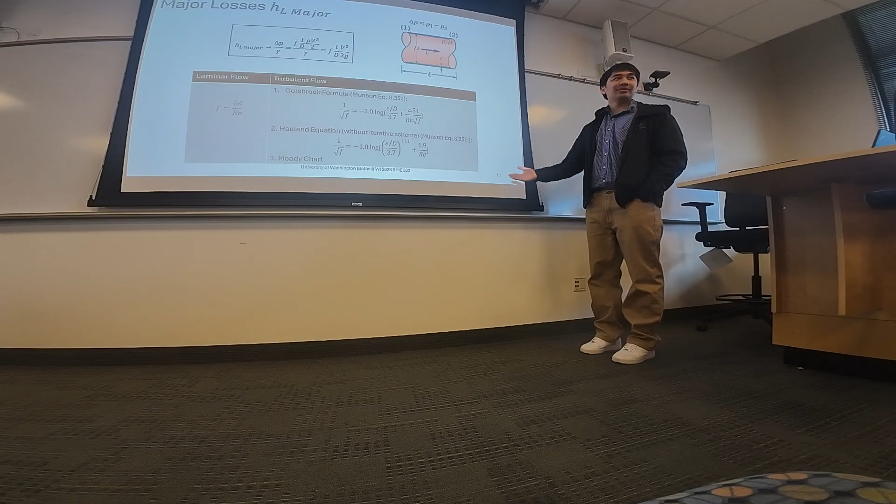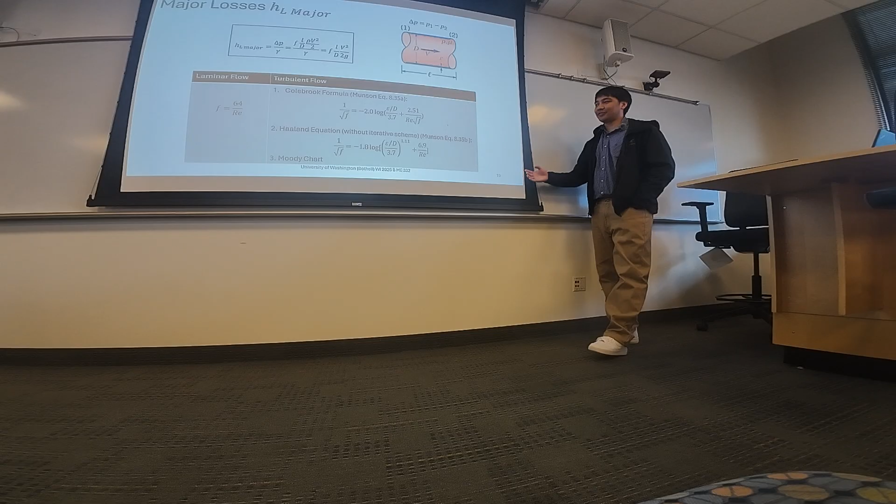And for turbulent flow, right, you have your Moody chart, which I showed you, but these are kind of the equations for the curves that you can plug and chug. If I ask for a specific one, I'll definitely state it. Right, the difference between these two formulas, this one is hard to solve for because there is a square root f within a log. So to algebraically rearrange this is a bit more difficult.

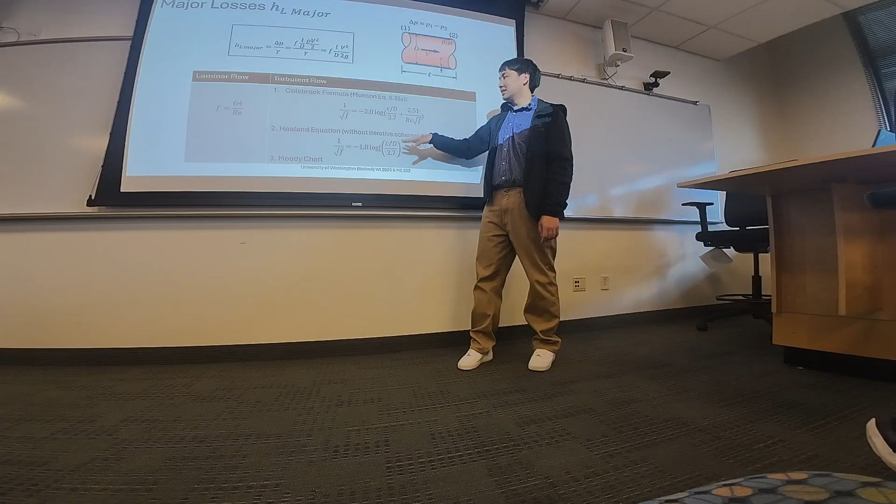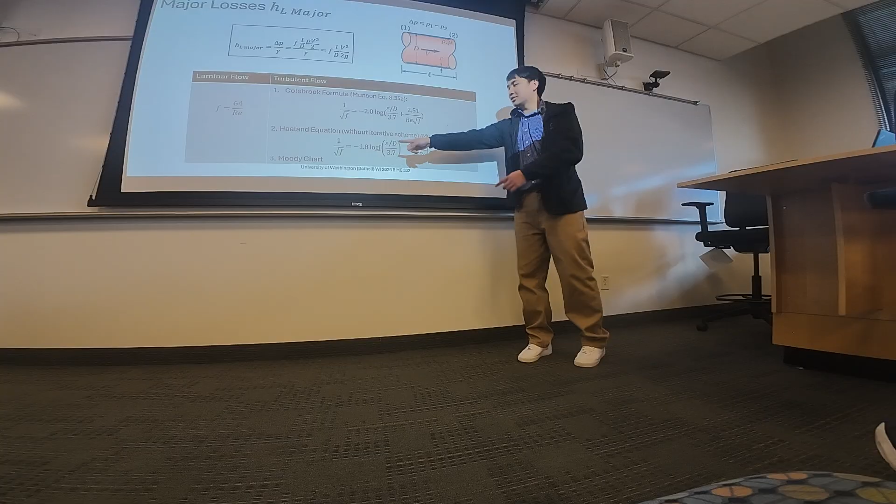This Haaland equation, hopefully I'm pronouncing that right, the friction factor is right here on the denominator. So right, like I said last lecture, you just multiply it over here. So it's on the top, this goes on the denominator, square both sides, and then you get your friction factor there. Or you can visually do it with the Moody chart.

Yes? Is there going to be a case where gravity is 0? Should not be, or else we would get a bad denominator, right? Because gravity would be in here. So, and we're always on Earth, so we'll have gravity. Okay.

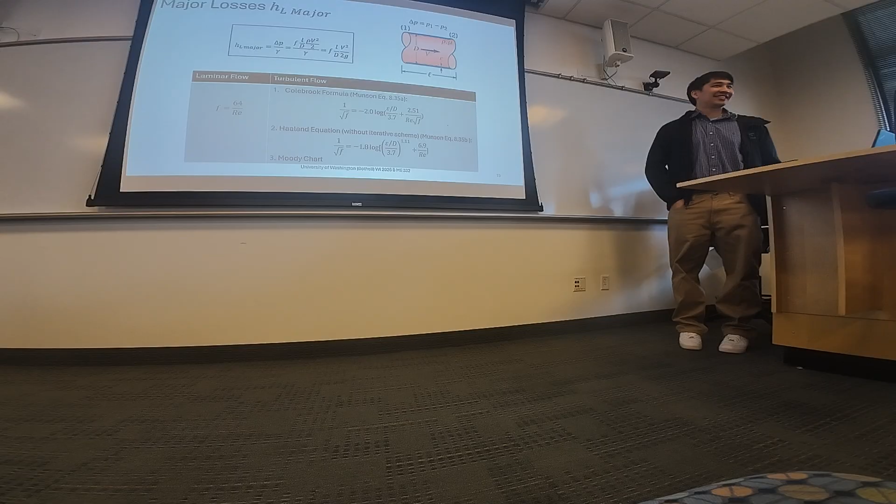Good. Okay, minor losses. So this has to do with loss due to piping components like fittings, valves, bends, tees, like in the dialysis presentation that we listened to, right? They have maybe some fitting components in their system. So there are some losses associated with that.

So the head loss, we already talked about that. The head loss for all components are given in a dimensionless form based on experimental data. So everything that we're going to talk about here for these fittings, they're dimensionless, kind of like our Buckingham Pi theorem. All of them, you'll see the graphs and stuff, they've just been tested by laboratories. So that's how we're going to get those values, and I'll show you.

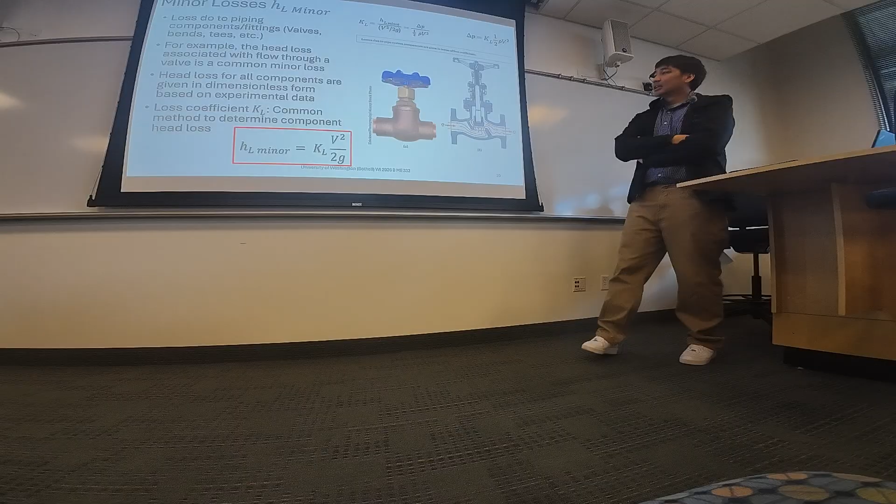And the big thing about this equation is your K subscript L. That is your loss coefficient. So that is basically the common method to determine your head loss for each component. So it's different for an elbow, it's different for a valve. I wouldn't worry about these equations too much up here, but if you need them for homework or something, right, KL is right there. It's your minor head loss divided by velocity squared over 2g.

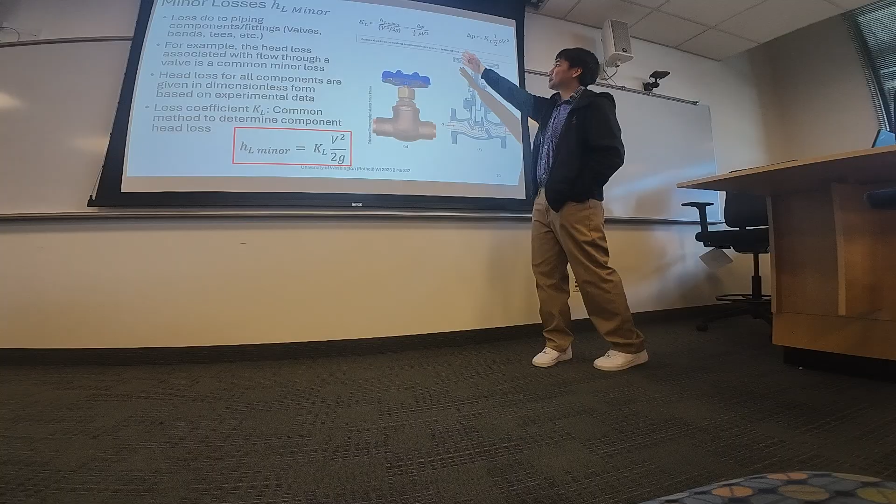And you can see you put in your pressure drop in there, delta P, if you need it, and you can solve algebraically here. The main equation you want is this, because this is what you're going to solve for when you plug into your Bernoulli's equation.

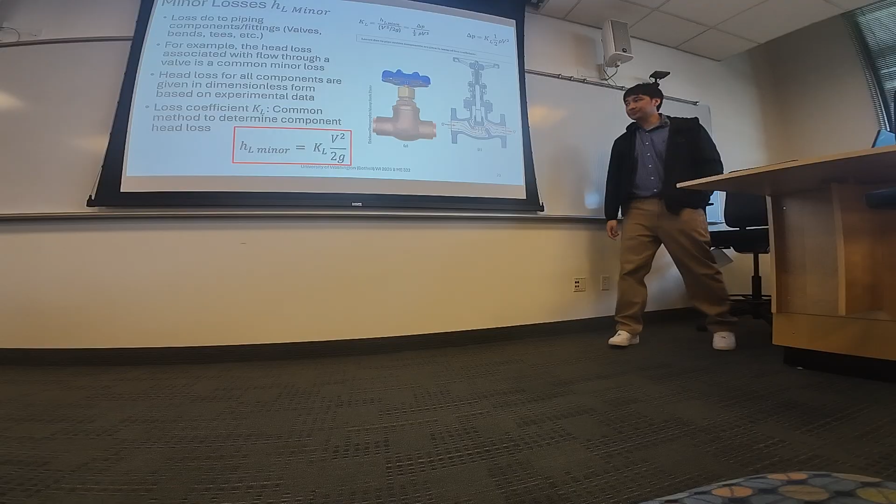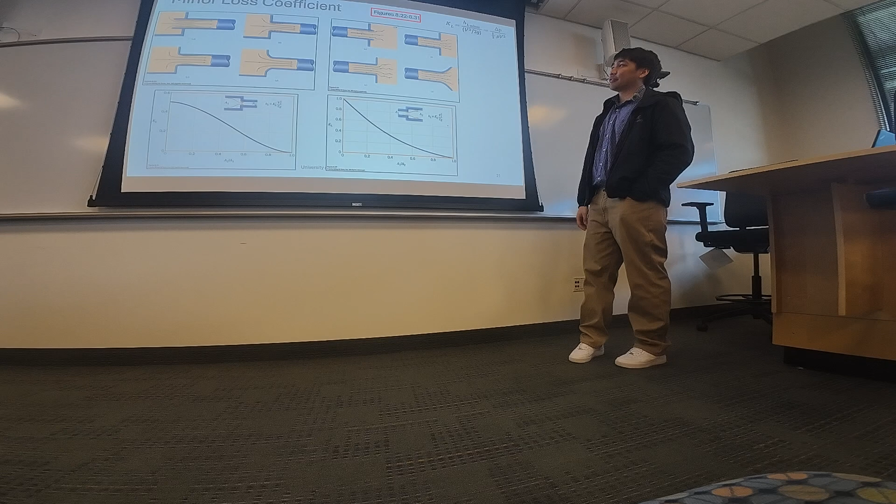Okay, so the minor loss coefficient, the KL that we need, you will usually get from these graphs and figures, right? And like I said, these are all experimentally tested already. And the moment you hear experimentally tested, you want to think in your head, ding, ding, ding, right? These are all not fully accurate, right? Because the person's experiment might vary from what you're working on. So just take that with a grain of salt if you ever have to do this for work.

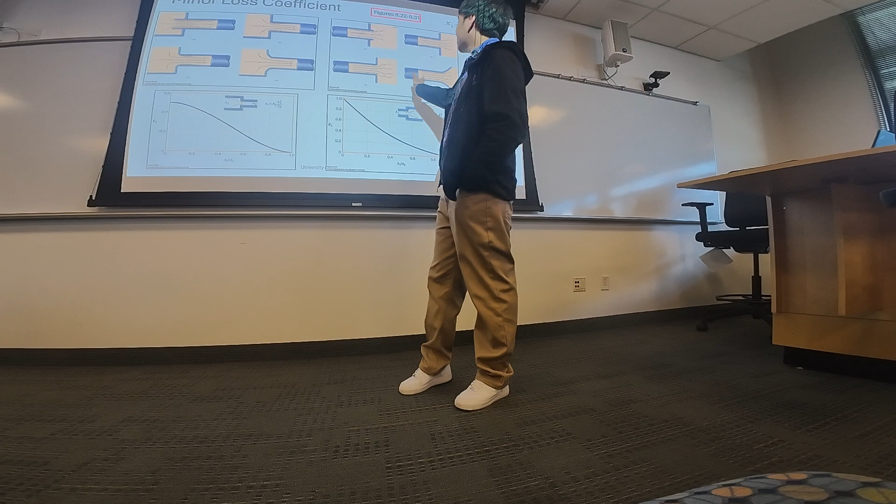So here, right, we have different scenarios. You can just see these are basically flipping, right? Your area 1 is greater than your area 2, or your area 2 is greater than your area 1. So you take the ratio of that, and then this is the experimental data that they made curves for already. And it's pretty straightforward, right? So you find your areas, calculate it, go up, find this, and then you find your KL.

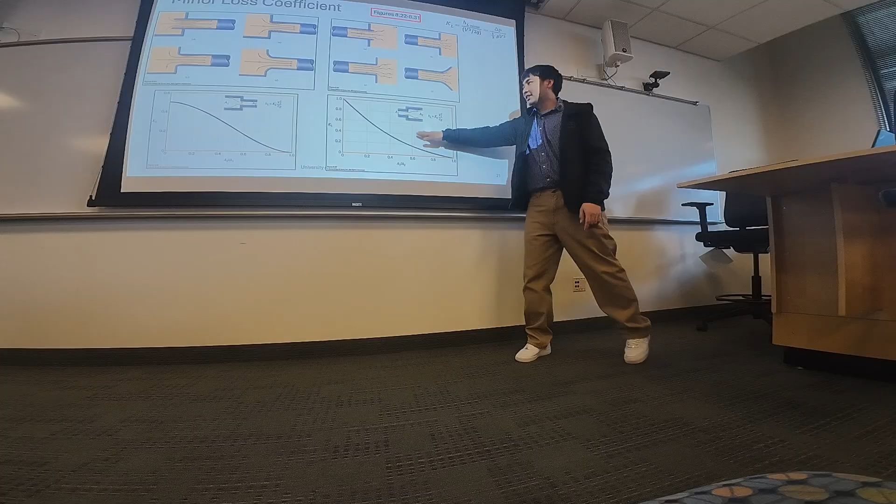Okay, non-circular conduits. We actually talked about this a few weeks ago, right? And the term conduits, that's just either your pipe flow or your square tube. So it's kind of weird. The textbook refers to it as non-circular, but this is just basically an annulus, which is a tube, but it's only like a donut. There's only water coming around it, not in the middle.

So I did not see any homework problems. I don't think I actually posted the homework yet anyways, but there's not any homework problems on these. But I wanted to mention it to you, since every single thing that we've been explaining for this chapter is all your standard pipe; this is if it were not to be a standard circular pipe.

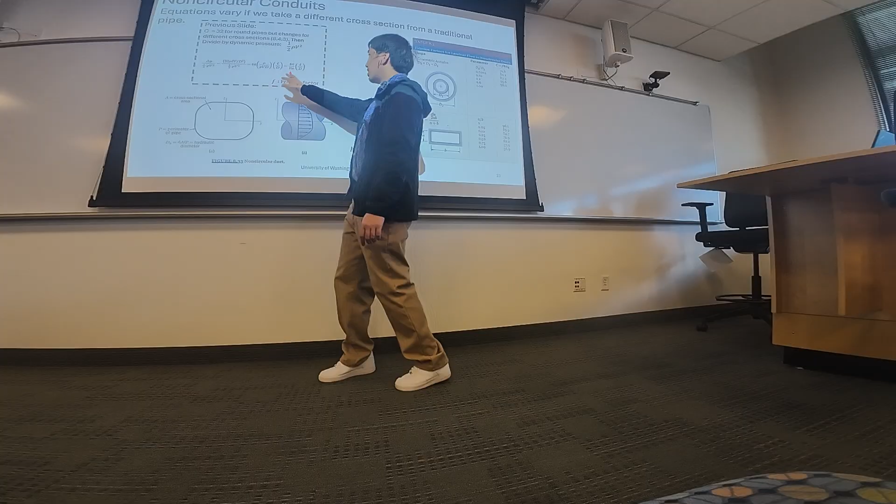So last lecture, I derived this equation for you to show where friction factor is from. And if you remember, there was a constant C that was 32, and that was just for your traditional circular pipe. But now that C changes for an annulus or a rectangle here. So you see the C here changes right there. So that's how your equation changes, and then you have your parameter d1 over d2. Hydraulic diameter we talked about before, right? That is just your 4 times area divided by the wetted perimeter.

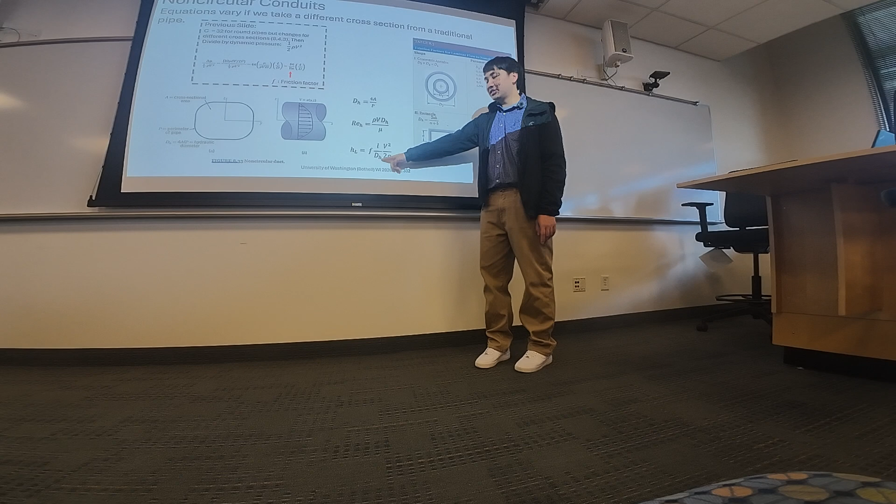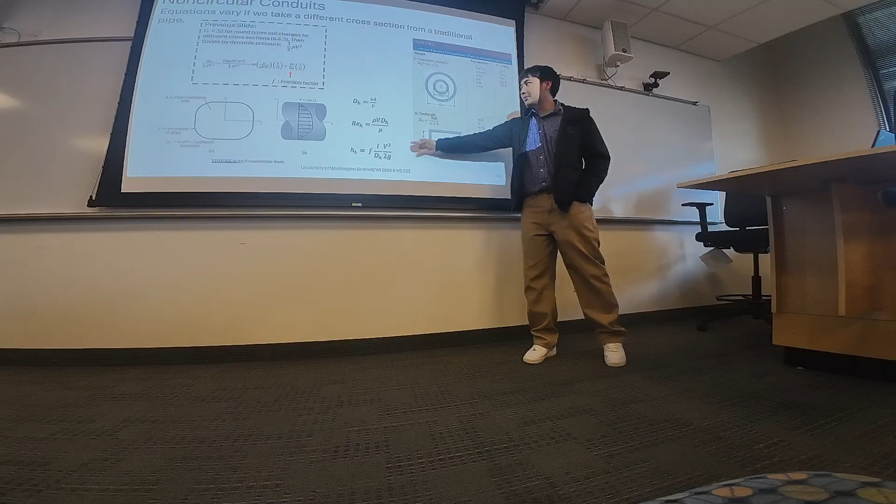Here is a side view of your velocity profile with that. And when you have these, your Reynolds number has to use this hydraulic diameter. It can't be your traditional diameter. And all the D's here change to this hydraulic diameter. And I also wanted to mention this because I remember in my FE exam, this came up too. So equations look pretty similar, right? The only difference is this hydraulic diameter, which is 4 times the area divided by the perimeter. Rectangle, if you had like a duct for HVAC, your hydraulic diameter is this equation, which is depending on the width and height of your rectangle there.

Okay, and like I said, I did not really see problems on the homework for this, and obviously if it's not on your homework, I'm not planning to put it on the final. I just put it here so if it comes up in the future or on your FE exam, you at least have an idea of what it is.

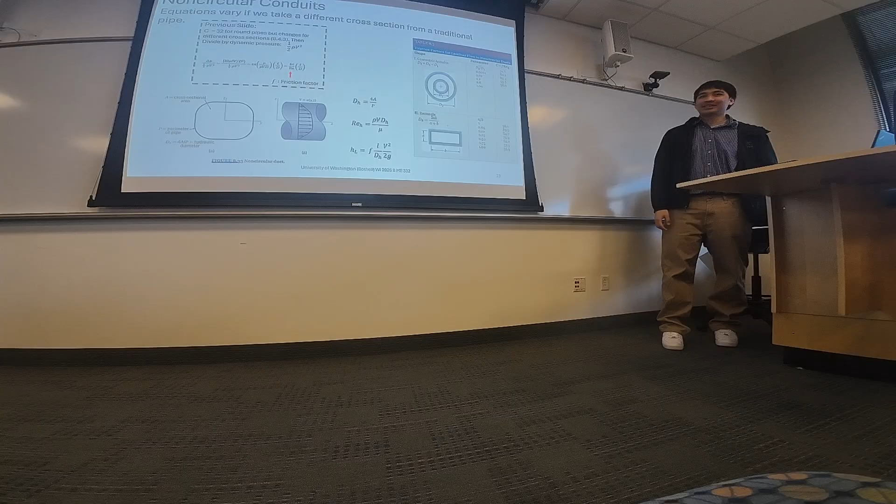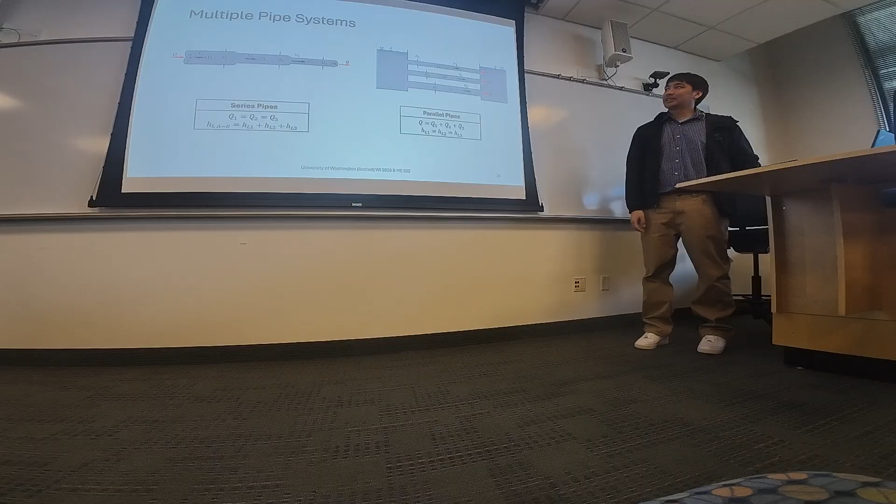Okay, here's more interesting things. This is a multiple pipe system. So this is a pipe system in series. So you can see they're just kind of connected here, and the diameter is getting smaller as you're going from left to right. Then you have your area. Q is your volumetric flow. Okay, so series pipes, you can assume that your volumetric flow rate, Q1, Q2, Q3 are equal.

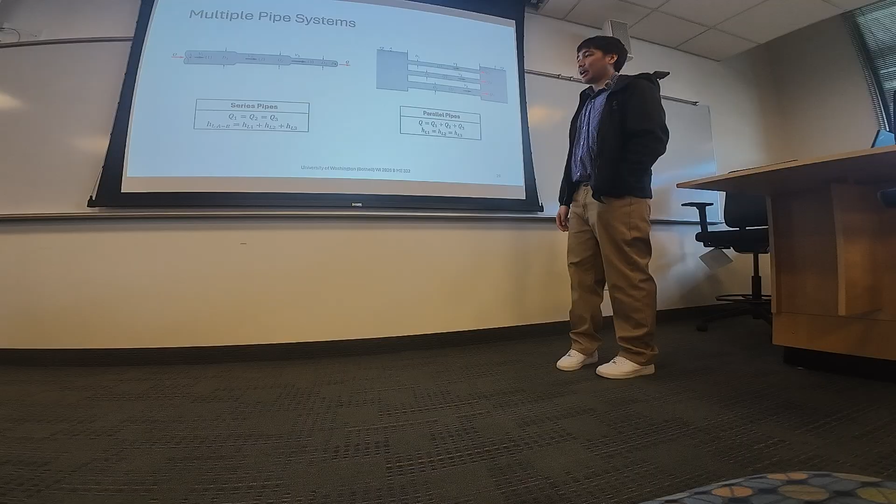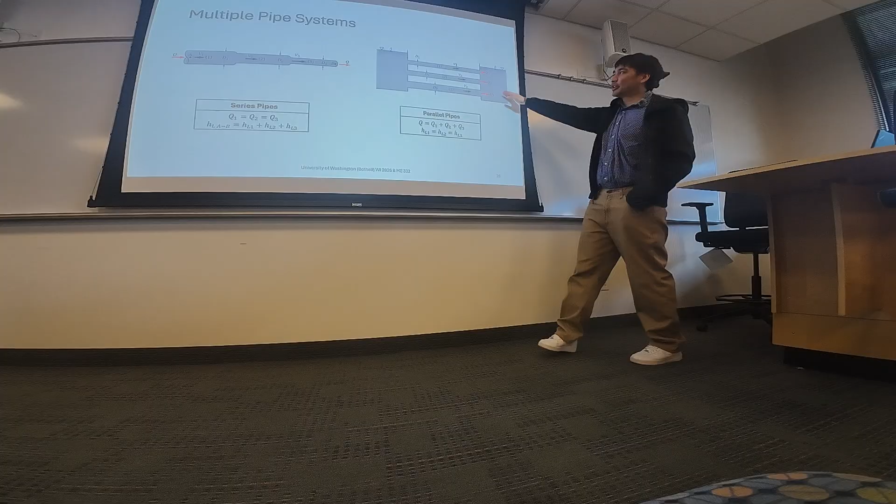And then your head losses for the first section, second section, and third section, you can equivalent them just by adding them. And then pipes in parallel, your overall volumetric flow rate, you can sum up in Q1, Q2, Q3. And you can see these are parallel, right? Just tubes in parallel. Maybe kind of looks like a heat exchanger, kind of. So diameter could vary, but these are your diameters. So it's pretty easy to see if they're in series or in parallel.

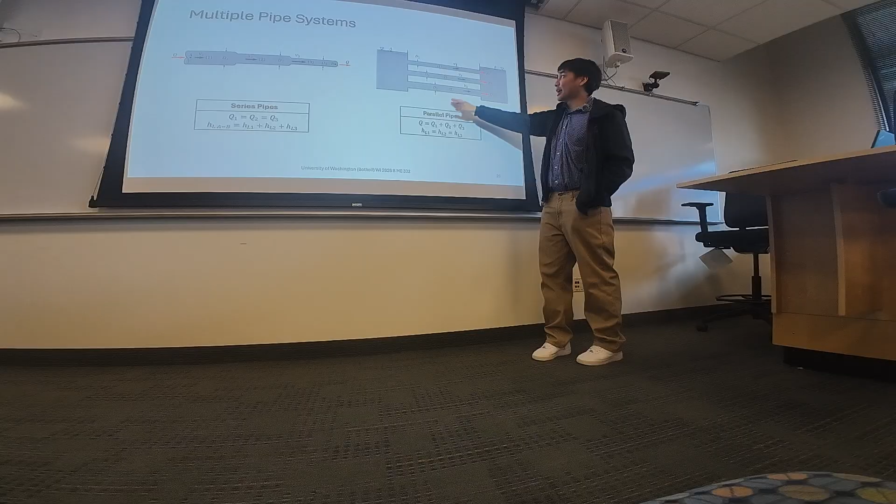And then here it's a little different. Your head losses are equal at each one of these tubes. So that goes back to physics 2 stuff, right? When you had circuits, you had your resistors, things like that. You have to add resistors in parallel or in series. So it's kind of a similar idea here, but with pipes.

Okay, here you'll need this equation for homework. There is something called a multiple pipe loop system, or in short, it's just a loop system. And sometimes they'll ask you, what's the pressure or velocity or density at this node? But then it's a little bit different from what we've been talking about, because we have a consistent singular pipe. This is outstreaming to 2 different pipes.

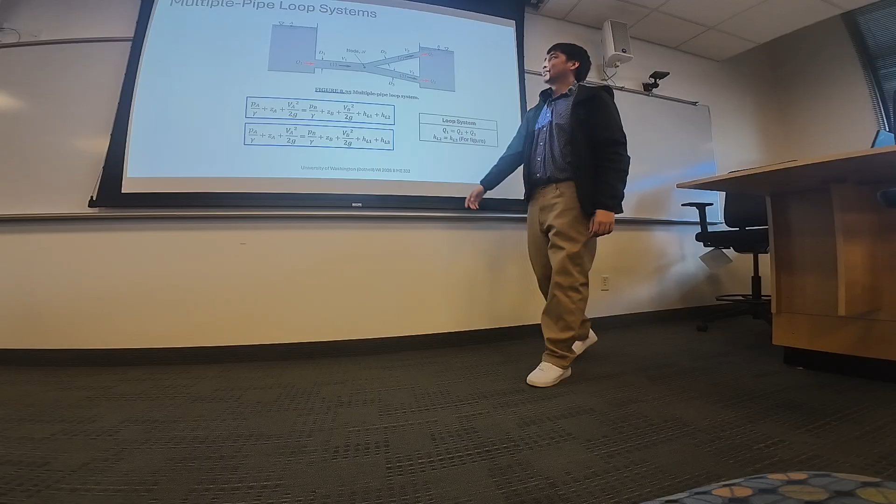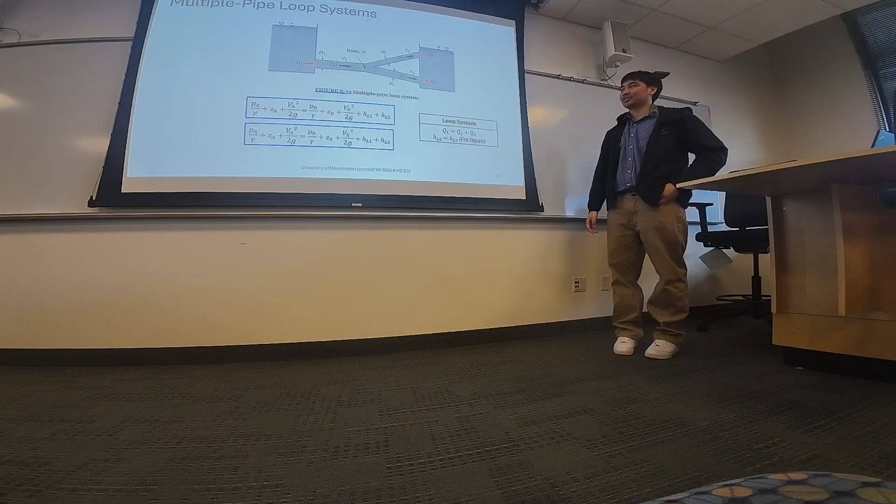So this just came to mind. I think the HVAC group asked me a question about your tube going into 2 directions. So this might have been more applicable, actually, if you had to use this. But that's okay now. I said you could set your assumptions in your project, which is totally okay.

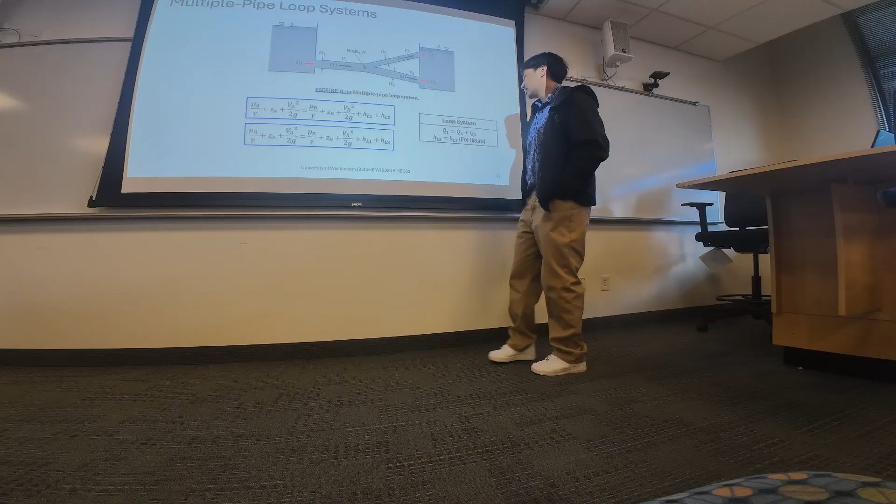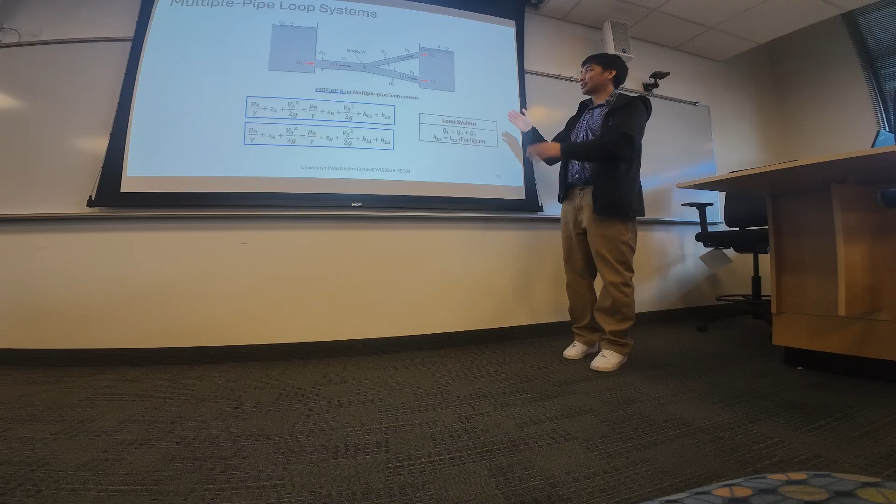So you can see you can write your Bernoulli's equation twice here. The only difference between these 2 equations is that the head loss at location 2 and the head loss at location 3 are equal. Okay, so for loop systems, this is what you mainly want. Flow rate in the first section, when it branches out to the 2 other sections, is equal to the flow rate in your second section plus the flow rate in the third section. And then the head loss for the second and third section are equal.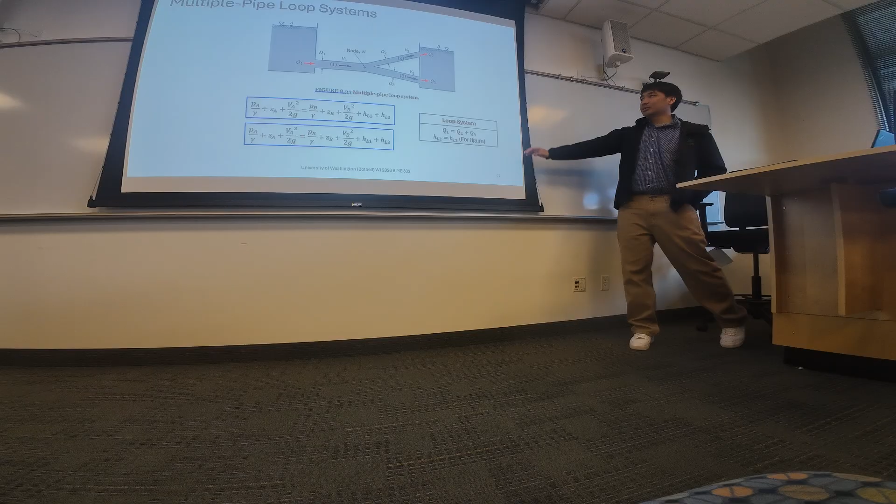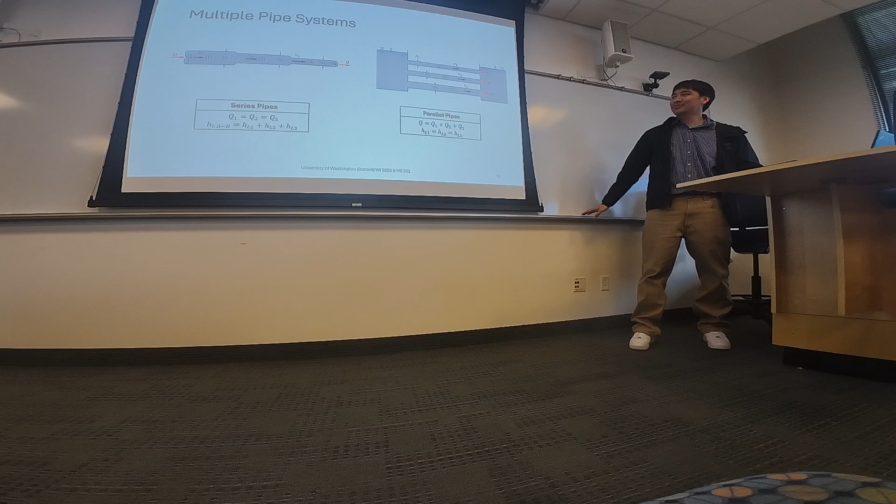Like I said, there's a homework problem about this, so you'll need this. I think there's also a homework problem in series. I'll try to post homework by tonight, but I think you'll be studying for your chapter 7 quiz on Monday, so I didn't think you'd study for this anyway. Oh, it is? Oh, I'm ahead of myself. Good job. All right. Yeah, you'll see I'm posting, replying to emails at 1 a.m., so I just kind of get in the zone and do stuff. So, okay.

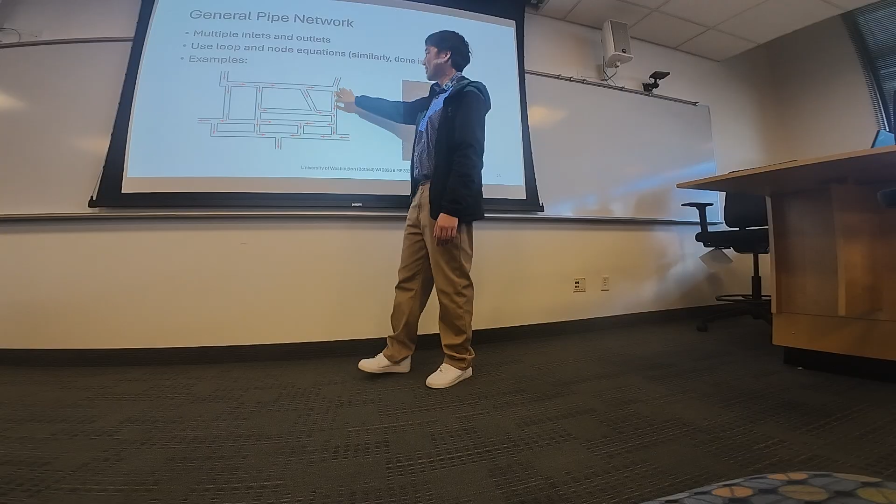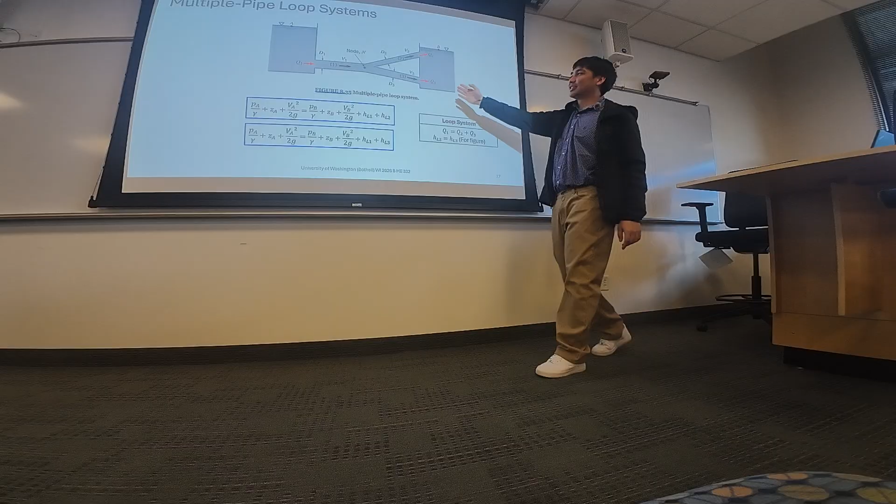All right, so here is a general pipe network. So this is what your pipes will look like in a city or underground, right? This is just connecting a bunch of pipes. You have your singular pipe, you have your loop system here, you can have them in parallel or in series. If you were to solve this, you would just take the node and then you would apply this equation here, and you would find these parameters here.

And you'd basically just spam Bernoulli's equation over and over and over. You'd probably want to write a code for that. So we're not going to do something that hard in this class. I don't think it's hard, it's just tedious. I just wanted to mention that. I heard there might be an advanced fluids elective. Is that true? This is something that they might have you do. Maybe a little sneak peek.